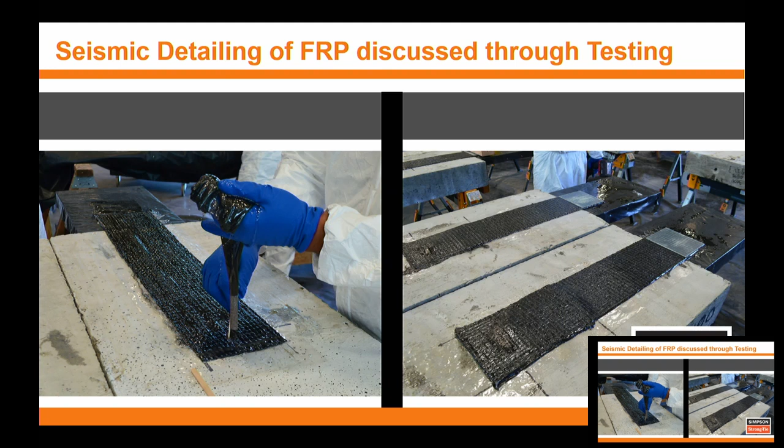And like Enrique mentioned, Garrett was here also for the FIB symposium. So we have Enrique with his research and testing, me from the manufacturer side, and how this information is useful to consulting engineers like yourself. I think we are trying to build a story here today.

So I think we've already gone through this. Both Garrett and myself and Enrique, we are all involved in several ACI committees. Maybe one more thing to add, a lot of other people are involved in this, so this is not an effort by just 3 of us. OSHPD is a governing agency in California, they do a lot of hospital retrofit work, so they were involved. KL Structures, Ravi Kanetkar is here, he was involved, and then there's a few more consulting engineers who are involved in this effort.

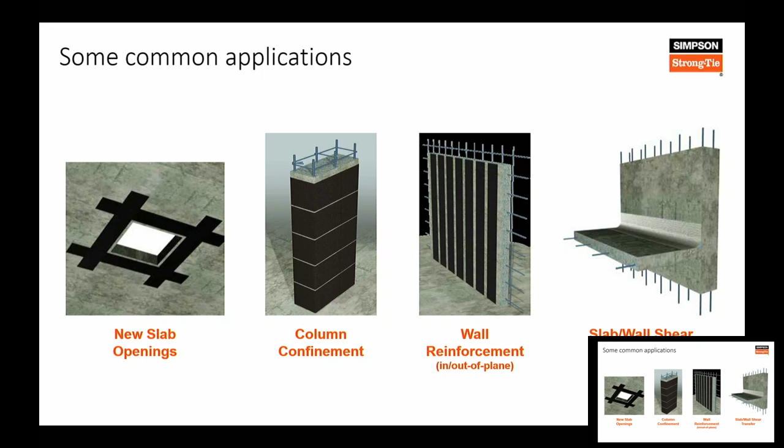Just before we get into the details of testing, we are talking about FRP elements, which is basically carbon or glass fiber reinforcing system. We use a lot of FRP on new slab openings, column confinement, wall strengthening, in-plane shear, out-of-plane mechanisms, and then diaphragms, as well as connections between diaphragms and walls. We'll go into each one of these subsequently in our presentation today. But with that, I'll give it to Garrett. All right.

All right, good to see everyone.

As Aniket and Enrique mentioned already, I'm a consulting engineer in the US, and we do a lot of existing building evaluation and retrofit. My specialty is existing buildings, concrete.

We have a lot of involvement in building code development in the US. The reason I'm here and work a lot with Simpson and others is that there's a big gap in our codes - I think the same in New Zealand - on how you actually apply FRP in design of an existing building retrofit. Simpson has fortunately been doing a lot of testing recently, funding a lot of testing, and Enrique has been contributing to that as well, where we're learning things and hopefully pulling that into our building standards in the US.

Here are a few standards available for FRP. There's an existing building standard, some of you may be aware, that we use in the US called ASCE 41. I believe you have a similar assessment type standard based on a lot of the concepts in there. Then there's ACI 440, which tells you how to strengthen with FRP itself.

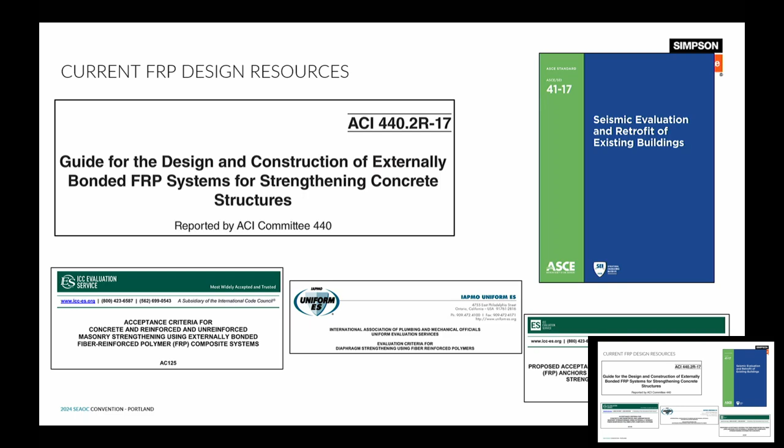The funky thing in the US is that the FRP standard does not talk at all to the existing building evaluation standard. So we have loads and acceptance criteria in ASCE 41, but it doesn't tell you how to use FRP. ACI 440 tells you how to design FRP for strength, but it doesn't tie that to the acceptance criteria in ASCE 41. We do have some other criteria out there, but again, they're inconsistent - they don't talk to each other very well.

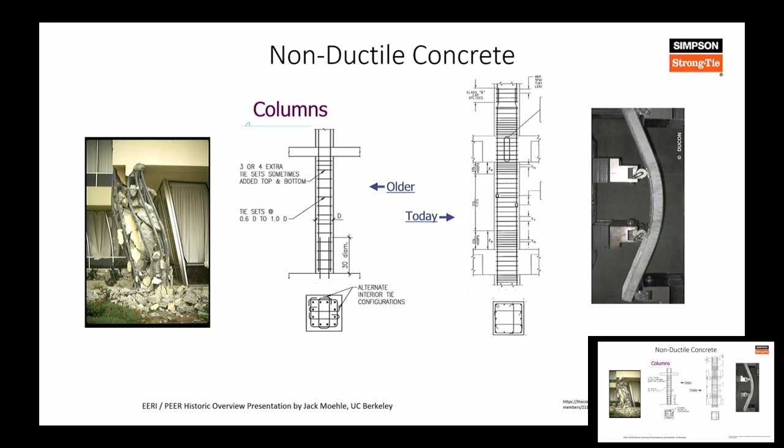In existing buildings in the US, we tend to have a problem with non-ductile concrete buildings. These are usually cast in place, so we're not typically dealing with the precast connections that I know you all have a lot of. But it tends to be light reinforcing and non-ductile behavior in the concrete elements.

The approaches we tend to take for this are either to add strength to the building, which usually means adding stiffness - you're trying to limit the amount of deformation demand on those non-ductile concrete elements. Or we're adding ductility, usually with FRP, by changing the mechanism. So if it's a shear-controlled mechanism in a column, we're making that flexure-controlled instead and hopefully getting more ductility out of it.

I'm sure all of you are aware of the concepts of ductility and brittleness or non-ductile behavior. In ASCE 41, we call something that's ductile as deformation-controlled. It doesn't have to be that ductile to be called deformation-controlled, but it means that we get a ductility factor for that type of behavior.

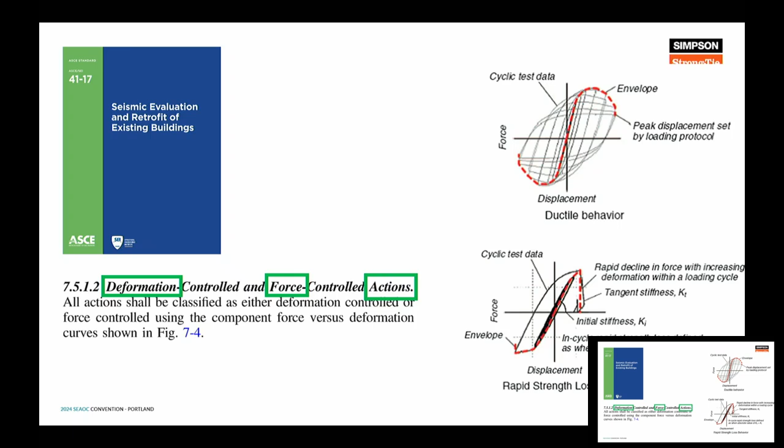Very similar, we call it an M factor in ASCE 41. I think it's very similar to your ductility reduction factors you all have in New Zealand. In ASCE 41, it's an M factor; for us in new design, it's an R factor, but it's a ductility reduction factor nonetheless.

Now, the standard says if you don't have a table that tells you what M factor you get, then you have to treat that action as force controlled. What that means is you get no ductility reduction factor in ASCE 41. At that point, you're designing based on a capacity-based design concept essentially - trying to make sure that's not the governing mechanism in your load path or system.

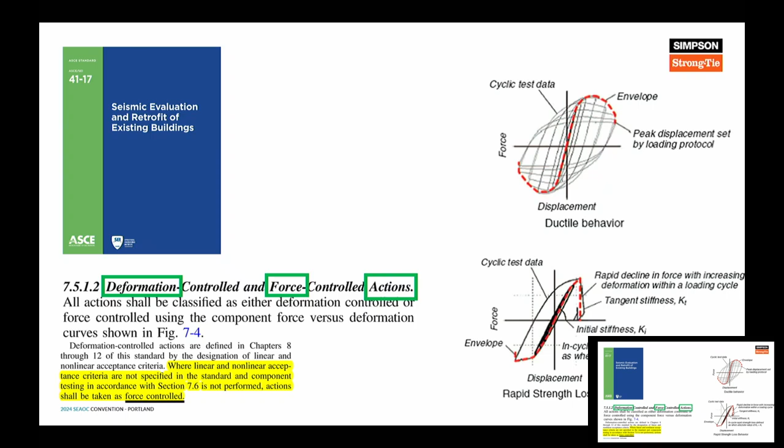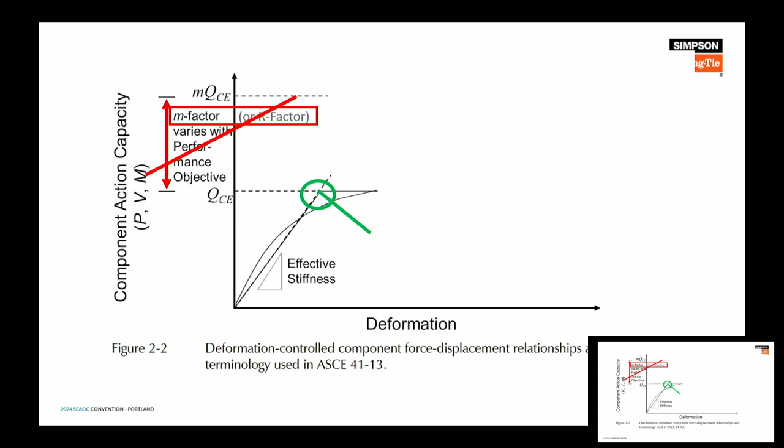That's generally the idea. So FRP we think of as pretty non-ductile. We don't think of delamination or rupture of FRP as a ductile mechanism, and we treat that as force controlled, at least right now. What that means is you don't get a ductility reduction factor - you have to design that mechanism essentially as being elastic in the FRP itself.

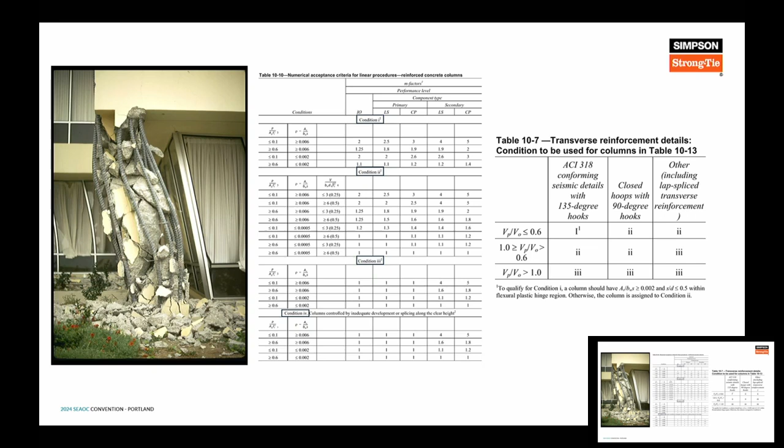Just an example of how we might apply this, and hopefully then we'll show how we're lacking some of this data and how all the other test data that Aniket and Enrique are going to show will benefit us. Right now, typically in an existing building, you might have a concrete column that's shear controlled, right?

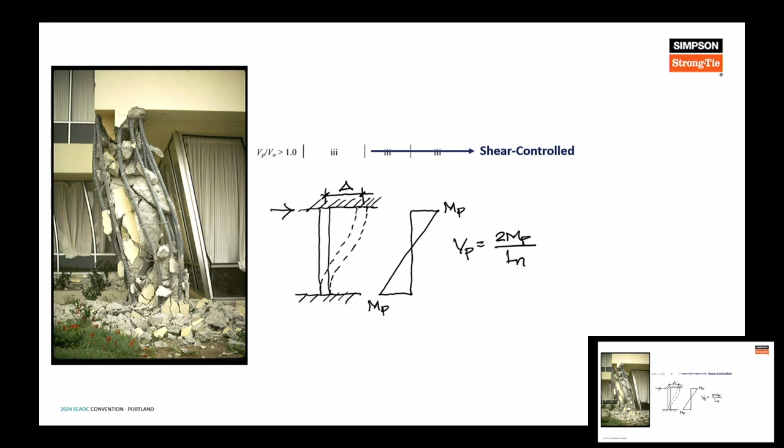So it has light reinforcing up the height of the column, governed by shear. An approach that would be pretty common in the US is to try to make that flexure controlled. So we use 2Mp over L - basically the moment capacity at each end, assuming a hinge - to get the shear demand in the column, and we put enough FRP up the height to change that mechanism.

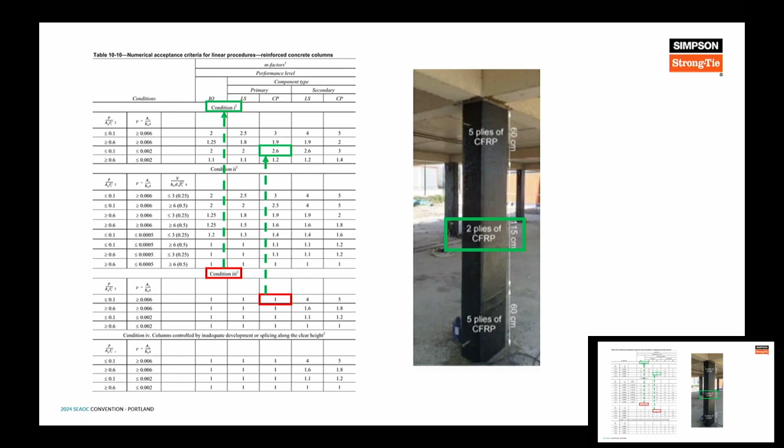So no longer is it shear controlled - that would be condition 3 here, which has an M factor, but it's an M of 1, so you get almost no ductility reduction factor in ASCE 41 anyway. But now it moves up to a 2.6, so you get some ductility reduction factor in your design when you can change that from a shear-controlled mechanism to a flexure-controlled mechanism.

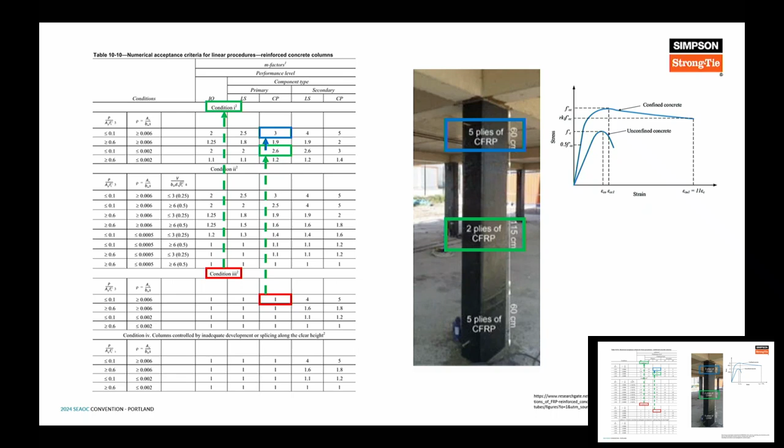And if you want to add even more ductility capacity, you can confine it in those plastic hinge regions. Again, the FRP itself isn't the mechanism, but we're using the FRP to confine the concrete. And then we have a flexure-controlled mechanism that you can use your Mander model or whatever else to design with. But ASCE 41, you can get an M factor for that.

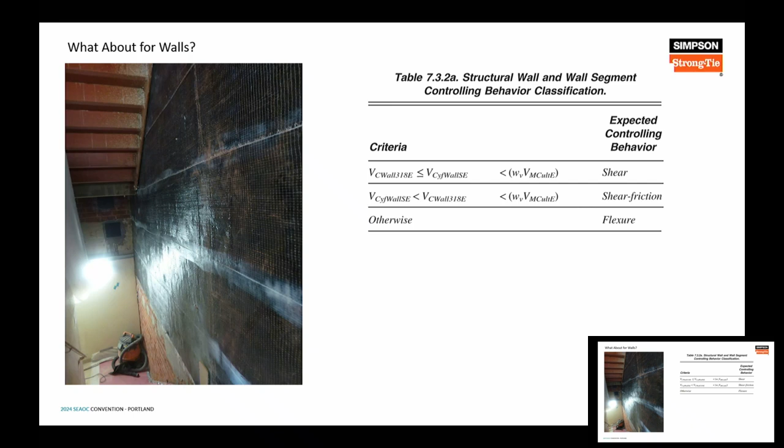The problem comes up when we have things that you can't really easily change the mechanism, right? So in concrete walls, for example, you oftentimes have a very long, squat, shear-controlled wall, and it's not really a reasonable thing to be able to add enough FRP to change it to be flexure-controlled, like with a lot of our columns. So what do you do in that scenario?

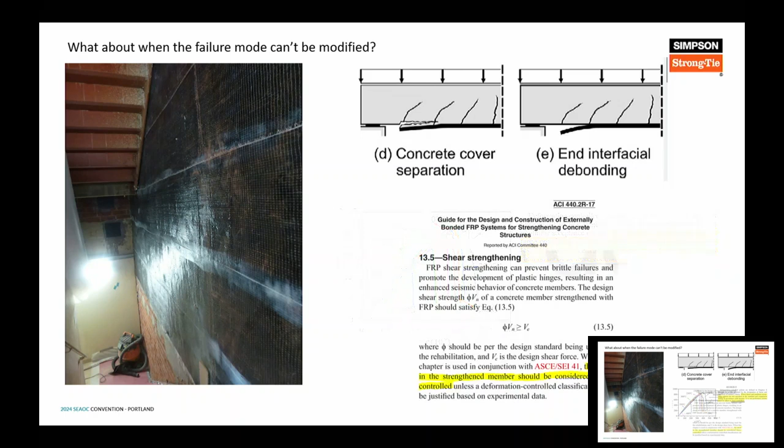If you can get a decent amount of increase in ductility, great, but if you can't, and you have to remain shear-controlled, we have to treat that FRP right now as a force-controlled action, and that becomes pretty infeasible, I would say, for a lot of buildings. At some point, you can't add so much FRP that you make the building elastic. The building's going to drift how it's going to drift, and you can only add so much FRP to decrease the drift demands. This is the statement in ACI 440 that talks about force-controlled behavior.

So I'll just talk briefly about the testing going on for walls, and I think there are a lot of tests. Aniket, I think, has more slides on this. But this is a program that Simpson put together at their lab in Stockton, California.

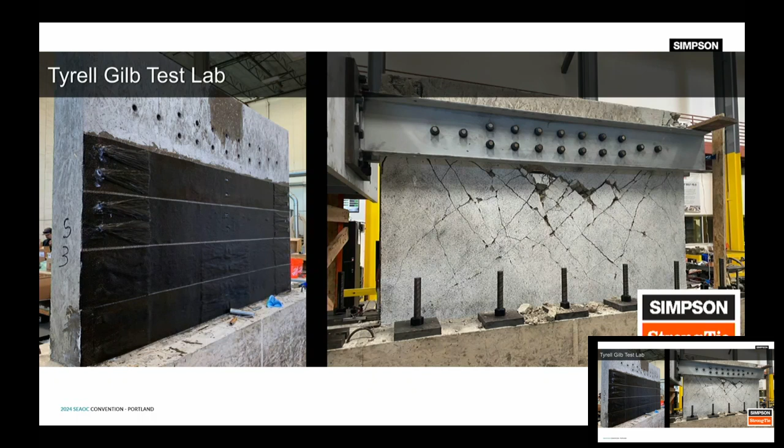And these are, you can see, a very squat wall, so it's very intentionally shear controlled. And it's meant to be so shear controlled that even after adding FRP, it remains shear controlled, because we want to see how much ductility it has in that scenario.

And that's a really key thing. That basically comes from that detailing that Aniket was referring to, anchoring well enough to where you're holding that concrete together. So you're ultimately getting sort of a crushing mechanism in the concrete, but you're able to get some of that ductility out of the vertical bars yielding along with the horizontal bars, and you're holding everything together as opposed to having the FRP rip off and delaminate and having your strength degrade right away.

So we're actually developing criteria now for this. Say, okay, if you have a shear controlled wall and it has these conditions, and you anchor it sufficiently well - and that's a key point, because we had a specimen where the anchors were not deep enough, and the anchors did basically nothing for the behavior. The FRP did very little for the behavior.

If you anchor deep enough, and you anchor to the capacity of the FRP and you hold everything together, you can get a deformation-controlled response, is what we're finding.

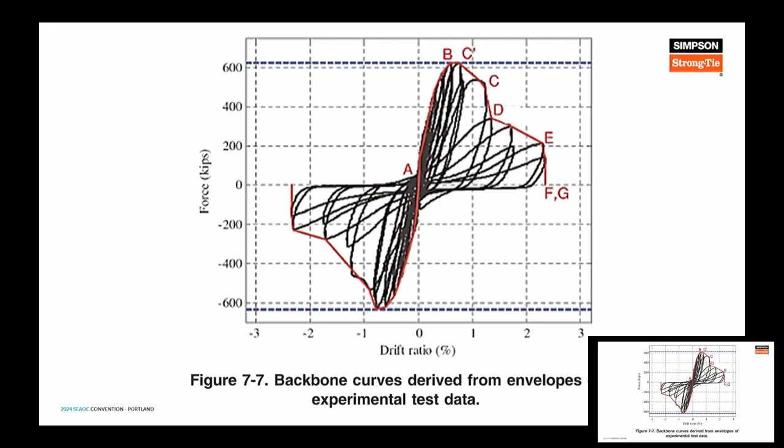So in ASCE 41, the way we would utilize that information is you have a backbone from your hysteretic curve, your load deformation envelope, and then we're going to pick some key points from that curve to basically get our acceptance criteria. The most important one being collapse prevention, because pretty much everything is governed by collapse prevention for us. That's kind of our biggest hazard check.

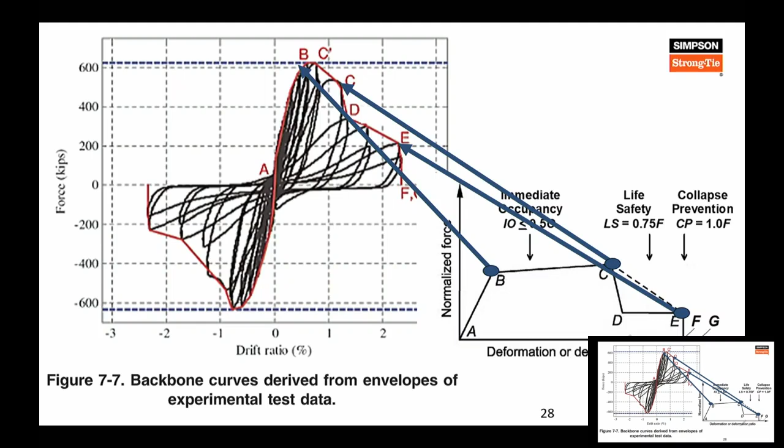I think here you have like one design level earthquake you check, right? We would have a design level earthquake in existing buildings and kind of a maximum considered type event that we're checking for collapse prevention explicitly. So that tends to govern at least a lot of our designs in California.

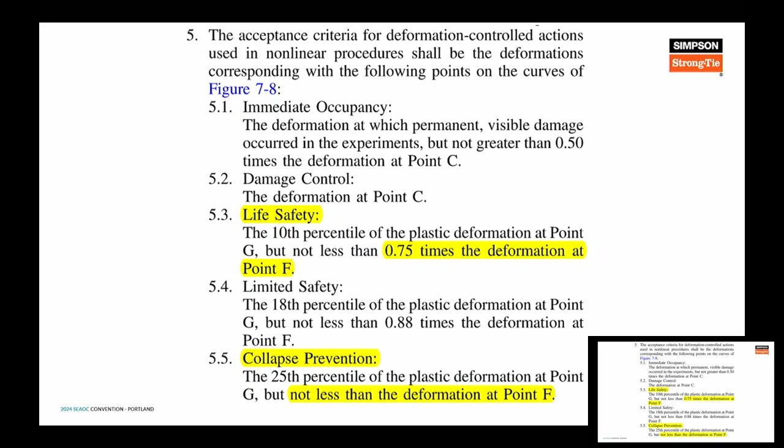So just pointing out, I'll wrap up here, but those are key points that you could draw from this actual shear controlled wall test. And that point again at the end is going to determine usually the collapse prevention limit. And you see a lot of the other points actually come off of that. So even our life safety limit, which you might use for a design level event, is backing off of that collapse type deformation. So just some points about things that are being developed. I don't want to take too much time here, but we're putting together these criteria.

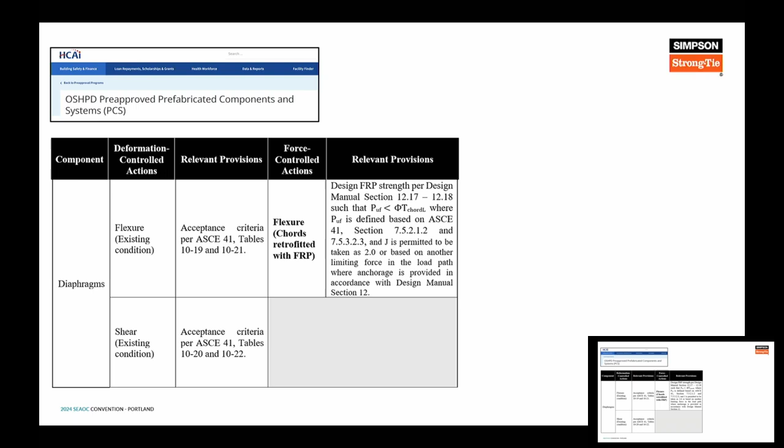This is from a pre-approval that we've been working on with Simpson on hospital review agency. We're hoping to clarify a lot of those actions and how you treat it as deformation controlled or force controlled. So, to be continued. Aniket, I'll transfer over to you.

Thanks, Garrett. So the next part, we are going to jump a little bit into diaphragms and shear transfer between diaphragms and walls in our next segment.

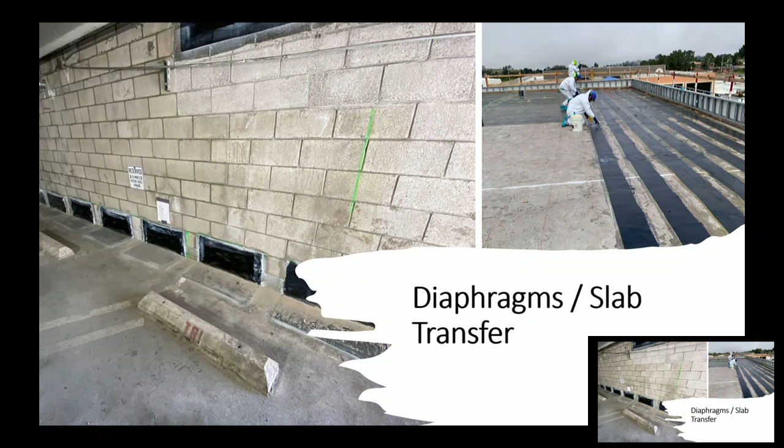So just to give an update, there are three big diaphragm test programs. About two to three years ago, there was not much research in strengthening diaphragms with FRP. A couple of years ago, Virginia Tech, a university on the East Coast in the US, got a grant from ACI 440 or ACI Foundation to study the behavior of FRP reinforced concrete diaphragms. Since then, they have done about 12 specimens so far, and I'll go a little bit into that.

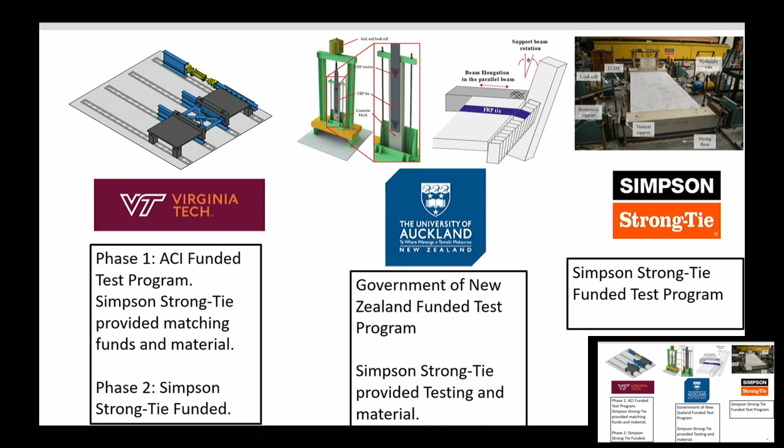Then Enrique and his team at University of Auckland got a big grant with the ministry here, specifically looking at precast diaphragms, which is very common here, but now they are expanding into collectors and shear transfer and some of the other elements, and he'll go through it. And then we were working on some diaphragm strengthening as well in the US. So all of this research is now coming together to a point where we have some decent understanding of how we can strengthen diaphragms with FRP at this point.

So going back to where we are, ACI 440.2R, which is what we currently use for design, FRP design, doesn't talk much on diaphragms. There is a task group, and all of us here are part of that task group. There's a building code, 440.13, so this is not a guide but a code that just got released a few weeks ago. It is only limited to gravity applications, not seismic. The next edition of this will have seismic.

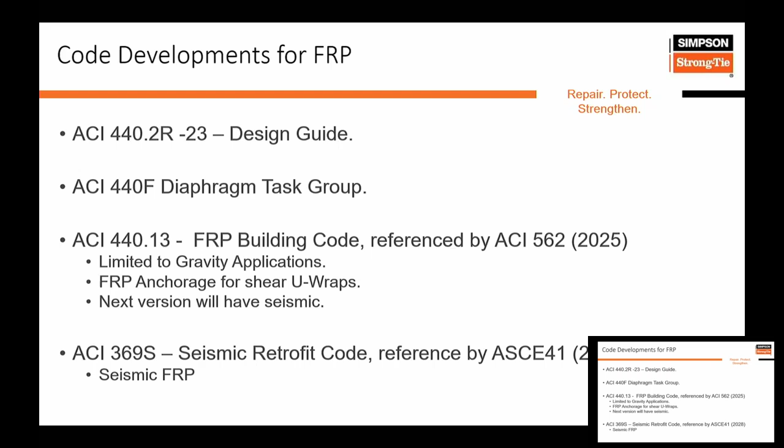And again, 369S is the seismic code, which will now talk about FRP strengthened elements as well. The first edition of that will be 2028. So all what we are talking today is part of all these documents.

So when we started doing this research, we started with a very simple test. And the question that we had was, how does multi-layer FRP ties behave on a diaphragm? We normally use 2, 3, 4, 5 layers of FRP. Most of the research that was there was done on a single layer FRP application with very thin ties.

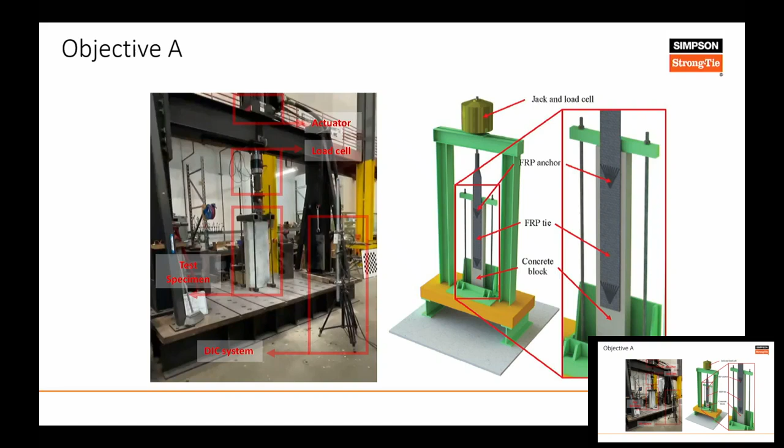So the simple test setup that we started was, we had a block of concrete. We have a block of concrete that you see in the middle there, test specimen. There is FRP right in the middle, as you'll see in the picture on the right, and you're pulling that FRP straight up. So this is a monotonic load test where the FRP goes in pure lap shear, and you're looking at the debonding mechanism of FRP, and then we did some more with anchors, and I'll go over that later.

The behavior on this specimen - again, the specimen is in the middle, there's a strip of FRP in the center. The concrete is painted white with black speckled dots. That's because of the DIC camera that's taking images, and it's tracking each of those black dots to give you a strain profile on FRP that's bonded to the concrete.

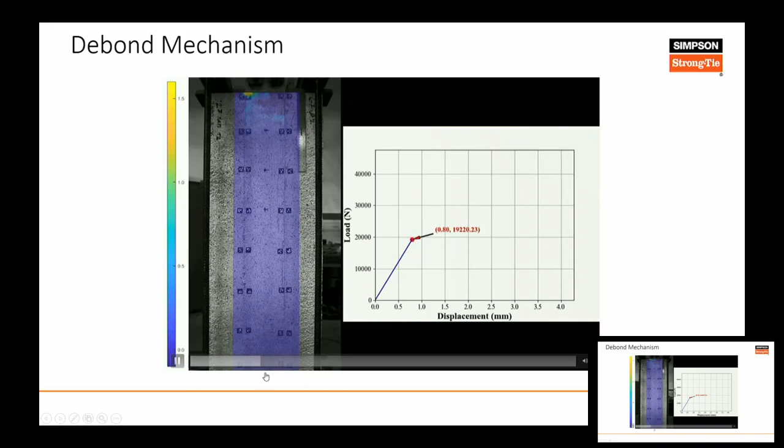So as this picks up, you pull the FRP, at some point your FRP delaminates, and once it delaminates, it continues to delaminate, and then...

Can you guys hear me? Yes, okay. Didn't like the video, I guess. I think maybe you did. I was trying to figure out if I was moving or something.

So once at a certain debonding load, the FRP delaminates, and then it just continues to delaminate. So if you think of a long FRP strip on a diaphragm, at any point where the force goes high and the FRP delaminates, you're just going to continue to delaminate your FRP right there. So why is this important? Most of the times for seismic demands, we are almost guessing, right? We don't know what exactly our seismic demand is. If your seismic demand exceeds what you're designing for, you're just going to instantaneously lose your FRP.

So this is not something that we want for seismic loads. So the next part that we thought about - and we did several hundred of these tests with multiple layers of FRP - we found that bond is unreliable. And why do we say that?

Most of the testing that we do here is on new concrete, because all of us pour new concrete in our lab, we put FRP, we test it. But the same when we are putting FRP on actual projects, these are 20, 30, 40, 50, at times 100-year-old concrete buildings. So there's imperfections in the concrete.

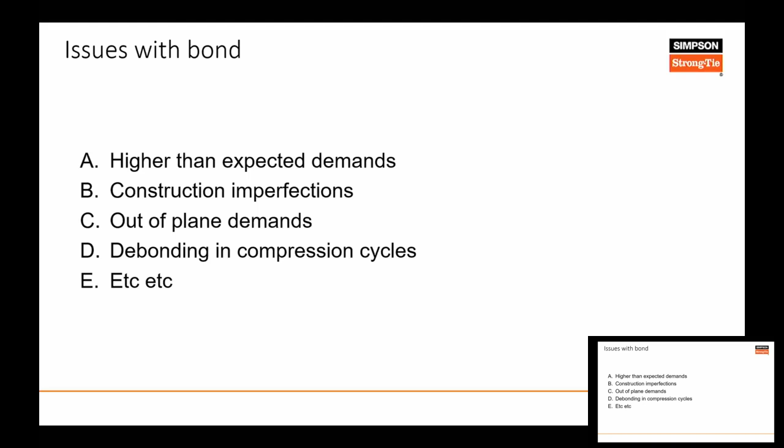So we didn't want to rely on bond to be our sole mechanism to transfer the forces between concrete and FRP. So the next thing to do was come back and put an FRP anchor.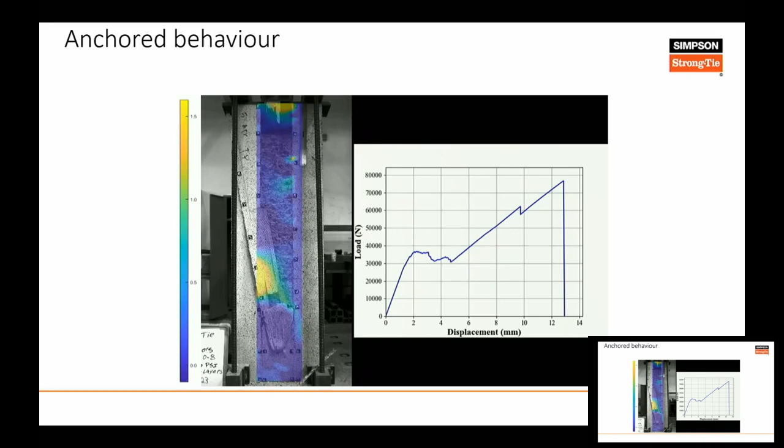So now with the same test, with the same FRP, at the same point it delaminates, which you see the change of color, but as soon as it hits the anchor, it just continues to pick up that force, until a point where either your anchor ruptures or your FRP strip ruptures. So at this point, and this is quite repeatable, you do test after test after test, it almost delaminates at the same spot or same location, then it continues to delaminate until it hits an anchor, and then it continues to pick up.

I don't know what is happening. Okay, so I'm on the phone. Let's try now. Maybe. Okay, so I'm just going to yell. I think I'm good at yelling.

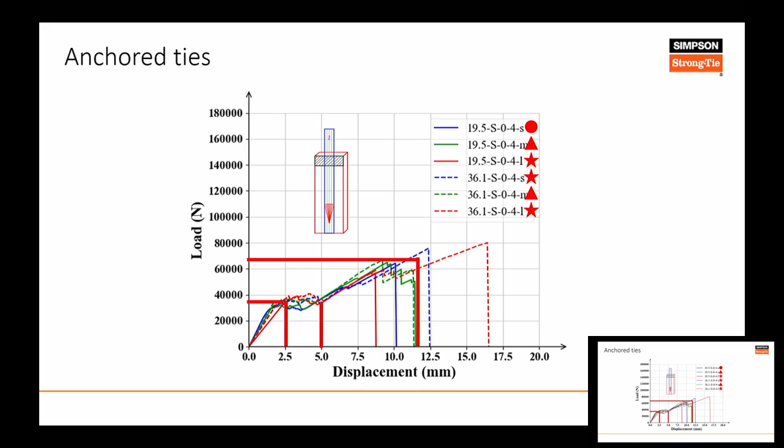So when we do that, now it's kind of repeatable, we know the behavior. So at this point, it's not purely brittle response that you would expect if you would just rely on the bond. It's going to debond, it's going to continue debonding where you get that flat line, and at the anchor it's going to pick up that force. So this is something that we can live with, and we can kind of get those points where it debonds and where the anchor or the ties rupture.

The next thing that we think about: if you just put one anchor at the end, most of the time transferring all that force into one single location, you can now start breaking the concrete beam, and Enrique will kind of talk about that. Plus, if your loads are too high, you are now going to concentrate all that load in a very specific area, and you may get different failure modes at that location. So at times you would need multiple rows of anchors, especially if your forces are high. You may need multiple anchors to share the force between the two anchors.

So again, this is good behavior. We know that anchors help. If you put anchors together and if they're designed well, they work and they share load between the two anchors.

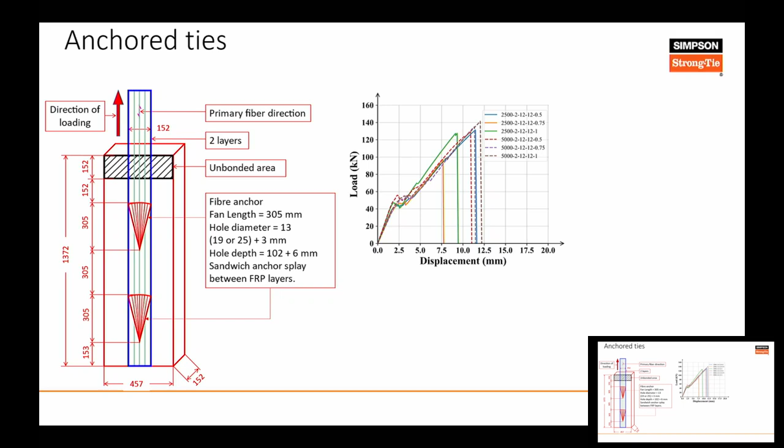We're looking at how far these anchors really need to be, because at some point the behavior changes. Once your FRP debonds, the first anchor picks up the force, but because the space between the two anchors is large, you get a flat line in between, and then your second anchor is engaged after that. So the two anchors are no longer working together - one anchor works first, the force goes down as it debonds, and then the second anchor picks up from that point.

So you can place these anchors. They need to be close enough so that you can share the force. They shouldn't be too far apart, or you won't get that load sharing between the two anchors.

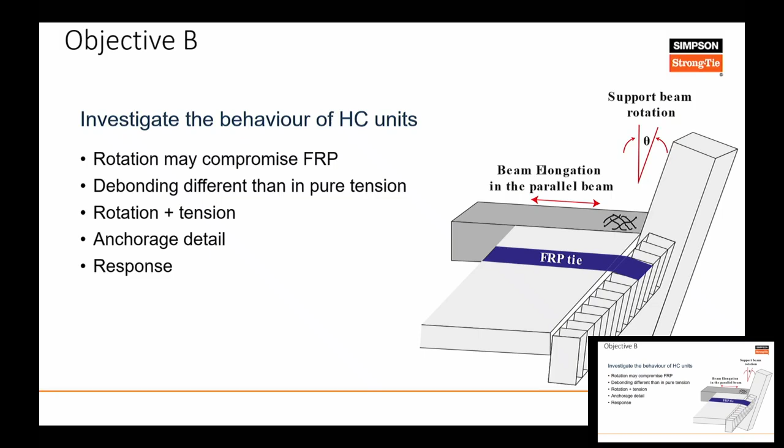So the question from industry when we started this project was, how do you know the FRP is going to survive those deformations? Is it going to pinch the FRP in compression and buckle and break it? How are you going to detail when your beam is like 300 millimeters wide? A lot of very valid questions, but to be fair, this is overblown in terms of scale. You can see the column is halfway there, but in reality that angle is like 1 or 2 degrees.

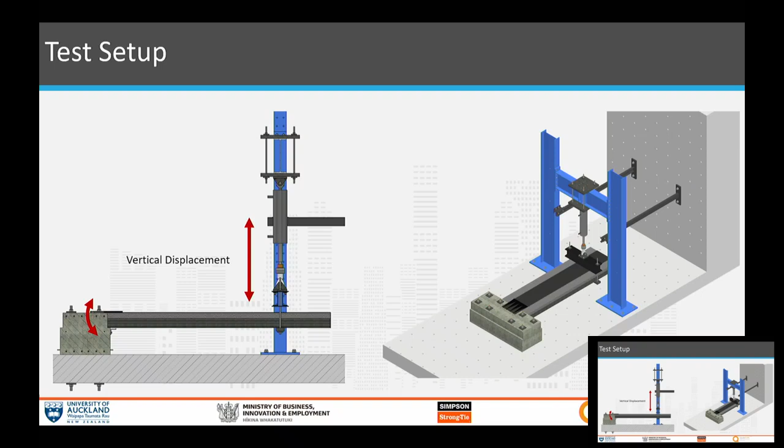The deformations are minimal. But basically what we did is copy this testing setup that maybe you've seen from previous work on precast without FRP, where we have the beam clamped down to the strong floor, and then the precast floor with the topping on top, and we move up and down, creating a negative and positive moment at the connection. Then we have the FRP on top with different anchoring details to take that tension force.

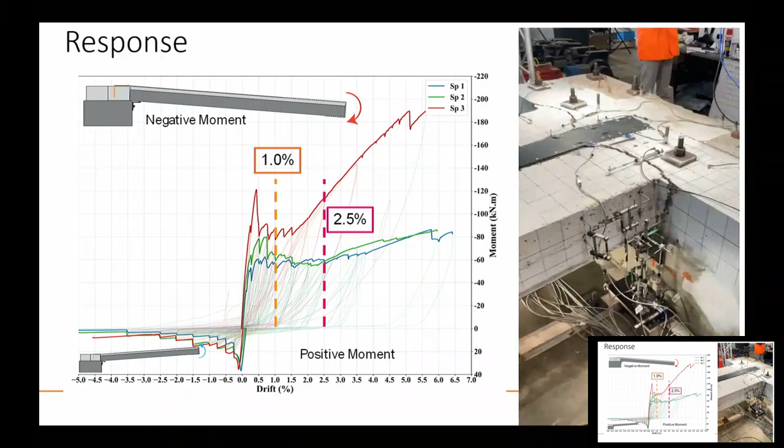That means 6.4% drift - that's the floor all the way down at 6.4% lateral drift. The FRP is still holding. Anchors are holding.

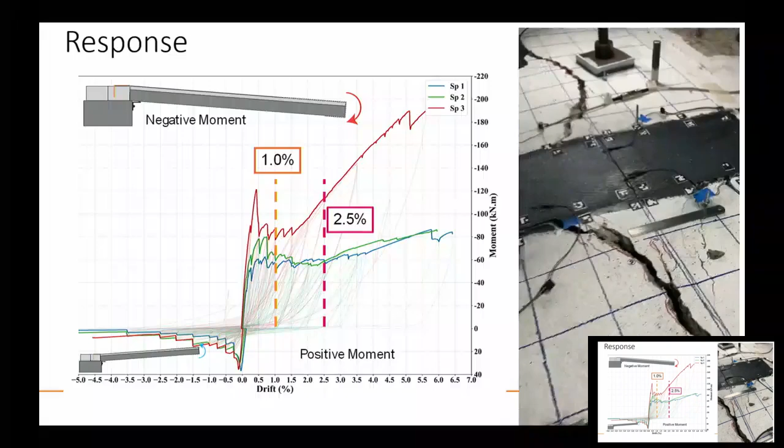6.4% drift and 0.7% strain - this is at the end of the test. This is tests 1, 2, and 3. Basically this is showing the exact same response we saw in the ties: a very elastic, stiff initial response, then the FRP debonds. Depending on the stiffness and whatnot, we have longer or shorter plateaus.

And then at some point, the anchors pick up that load, and it becomes a cable - basically an elastic spring between the anchor point on the beam and, in the test case, the anchoring point at the loading end. If this were a real building, we'd have one anchor there and one anchor in the next beam, becoming a cable between the two beams.

Now, to bring a little context on the real design - Mohammed put here a 1% line, which is a common drift level in these strengthened buildings, and 2.5%. At 2.5% lateral drift, something else has broken for sure - the building isn't going to be usable if we reach that level. But we still have so much to go. Even at 6.5% drift, the strain is only 0.7%, about half the rupture strain of the FRP.

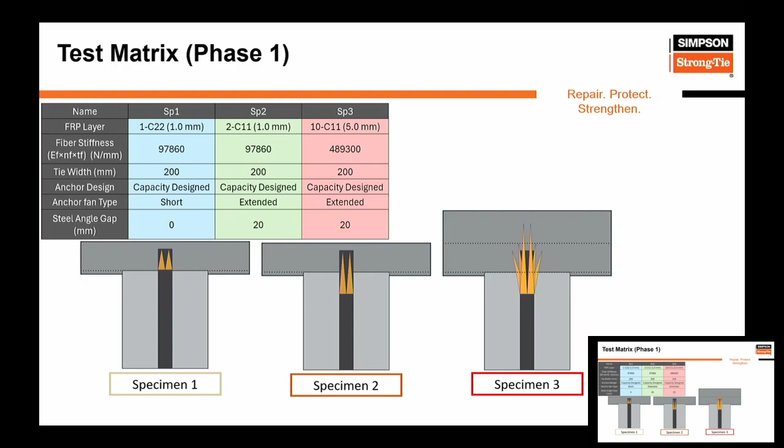That's why the response was so steep. We tested different anchoring details, and we also tested the gap of the steel angle at the bottom, whether it's right up against the floor or we have a little gap, and it doesn't make any difference at all. So we were very happy. We thought, okay, this is great, we can go home, we nailed it.

Until we went to test number 4, where we made it full width of the FRP, which is what we use in real life. And what happened? We broke the beam. We destroyed the beam completely. Why? Because we introduced a shear failure plane there, and we broke out the beam - a breakout failure.

In hindsight, it's obvious, right? Hindsight is a beautiful thing. On the day, we're panicking, losing our hair, thinking what is going on here.

So we thought, okay, let's extend the anchors, try to move the failure away from the plane, from the interface, back into the unit, so the FRP bonds here, as we saw in tests 1, 2, 3.

That was much better, but still we broke the beam - the stirrups held it together, but we still broke the beam. I have to say, even though we broke the beam, that happened at 2% drift, I think, right? Or 3%? 3.5% lateral drift. So this is way beyond design criteria. Something else has collapsed for sure. Still, I don't feel comfortable designing that.

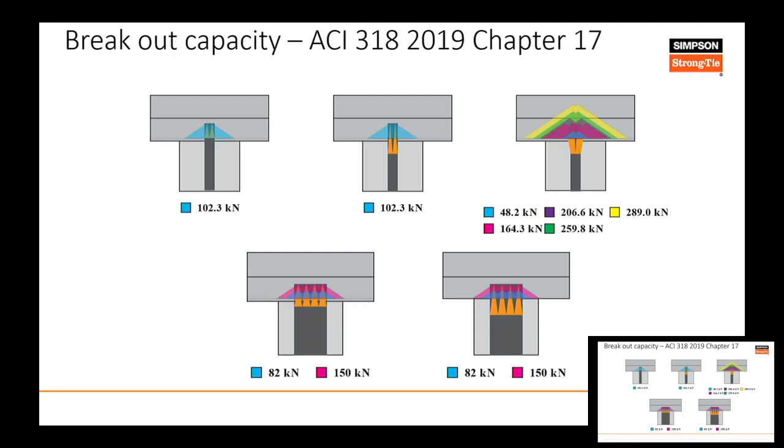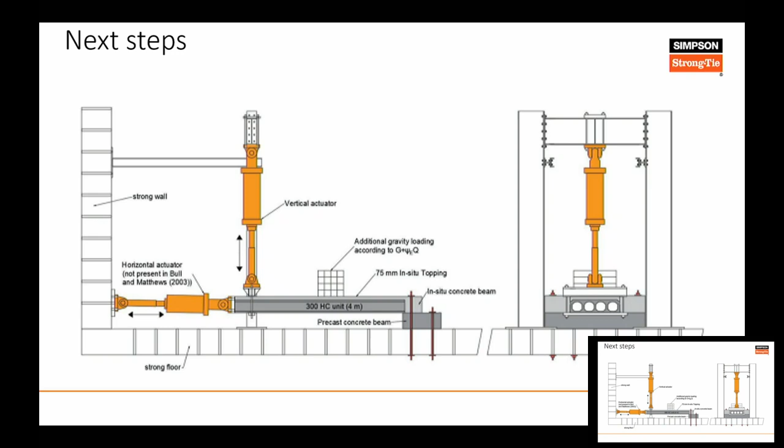What we are going to do next, Mohammed is going to do one more test tomorrow, but after that we are going to include tension and rotation. Of course this is going to make it worse. The question is how much worse. That will happen next year. And with this, I will leave it to Aniket again.

Thank you. Thank you, Enrique.

So the next segment, going from these tests to now a full diaphragm test. This is work done at Virginia Tech University with respect to diaphragms. This again goes back to how we look at diaphragms in the US, looking at it as a deep beam instead of a strut and tie model. But some of it is relevant here.

We wanted to see what the debonding strains were, what is the ductility, what happens when you don't detail FRP that well, and what happens when you detail FRP well enough.

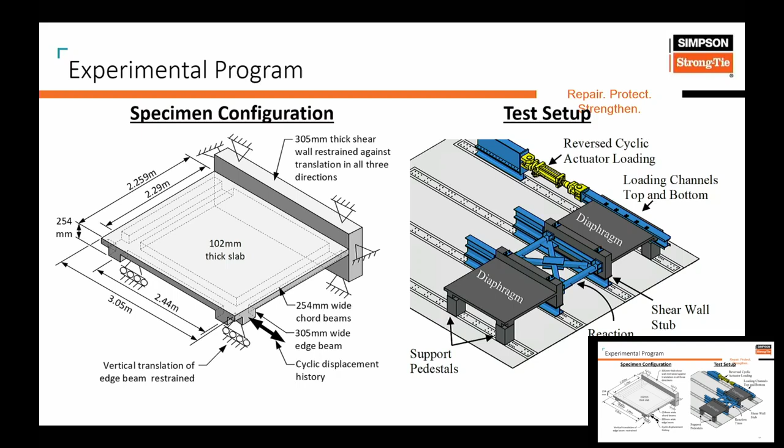So their test setup was a little bit different. They kind of put two specimens at the same time. Looking at the picture on the right, it's about a 3 meter by 3 meter diaphragm with a shear wall on one side. There are two separate specimens, and an actuator pushing and pulling that diaphragm specimen. Once they test one specimen, they get the actuator and test the other specimen at the other end. So the tests are 7, 8, 9, 10, 11, 12.

The first 6 were not super relevant - there was still one layer of FRP with a lot of steel. These are all concrete specimens, low strength concrete, about 20, 22 MPa, with more FRP.

So we have 2 layers of medium thickness FRP in one direction with anchors. Going back to my previous discussion, because the forces are so high, we cannot put one row of anchors - you're going to easily pull out those anchors at that location. So we have 2 rows of anchors sharing the force.

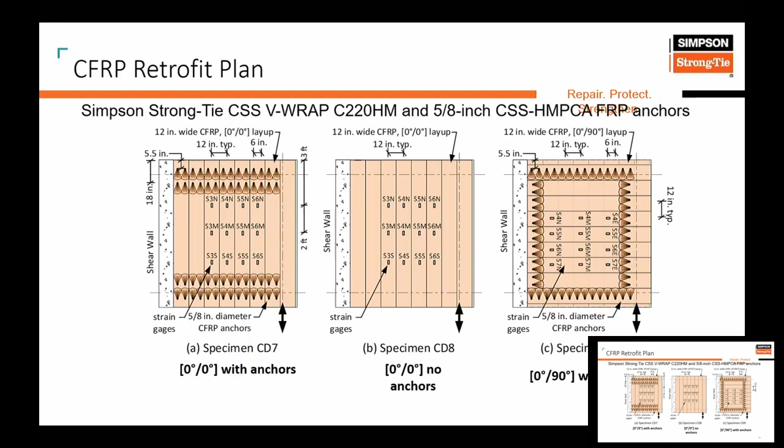For CD8, we put the exact same FRP as CD7, but removed the anchors, and wanted to see the behavior of that specimen. For CD9, we took the FRP, divided it into half, put it in each direction, a little bit like how you guys do it with strut and tie here, and then anchored all the perimeter of the diaphragm. In the interest of time, I won't show all the videos.

This was the video of the specimen with no anchors. And as I play the time-lapse video, this right here is your wall.

This right here is you're moving the beam back and forth. This is just the top view, and this is kind of the isometric view of the specimen. As this starts to move more and more, maybe focus on the picture on the left-hand side. That will give you a little bit better idea.

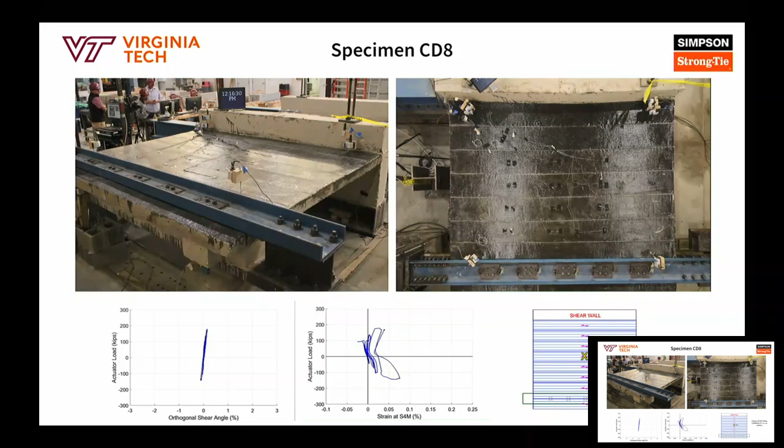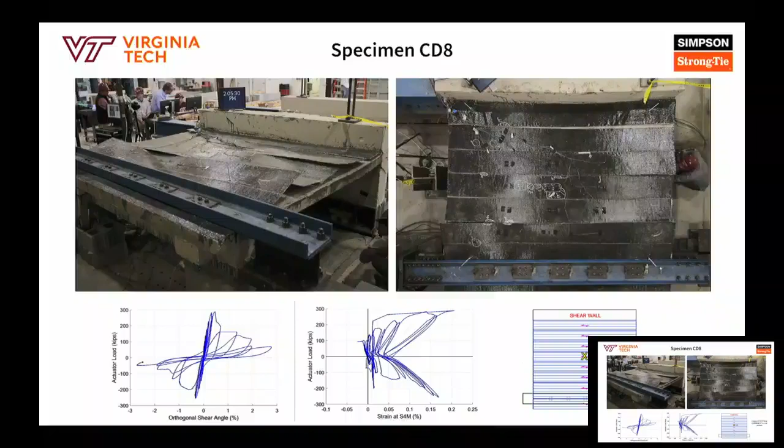At this point, FRP bond is enough, it's kind of picking up all the force. But when it debonds, you can see how the debonding mechanism goes. So this is again FRP with no anchors. FRP has started to debond with those chalk marks, but once it debonds, your entire FRP is just lost. In an instant, you basically lose your FRP, and then you just have sheets of FRP floating on your concrete substrate.

Now looking at the other ones, in the interest of time I didn't have the other videos, but CD7 was the one with anchors. You still got your shear crack. When you go underneath the specimen, you had cracks, but the failure plane was more shear friction at the end, the connection between your diaphragm to the wall.

The CD8, which doesn't have anchors, you just saw that you lost your entire specimen. Once you lost your FRP, your concrete just got crushed, all the concrete fell down. That's definitely what you don't want in your building. If your forces exceed your FRP debonds, you don't want any collapse of your building or slabs, potentially injuring people. And then the other one on the right there is anchors on all sides.

Again, the specimen is in much better shape, but it failed in shear friction. At about very high loads, the connection between the concrete specimen and the wall broke, and then the specimen just started sliding. Again, something that we can control - we can reinforce that connection, but based on this, just the importance of detailing FRP with FRP anchors is crucial.

So now that we did that, now there's different ways we strengthened our diaphragm, we added all that stiffness or the FRP on our diaphragm. How do you get that force back into your lateral system? These were tests done at NCSU, North Carolina State University. You have a wall there, you have a slab, and there is nothing connecting the wall to the slab. The only thing connecting the two is layers of bidirectional FRP with FRP anchors. You hold the slab steady, and you can see the jack that's pushing and pulling the wall. This is transferring your shear across the joint between your diaphragm and the wall.

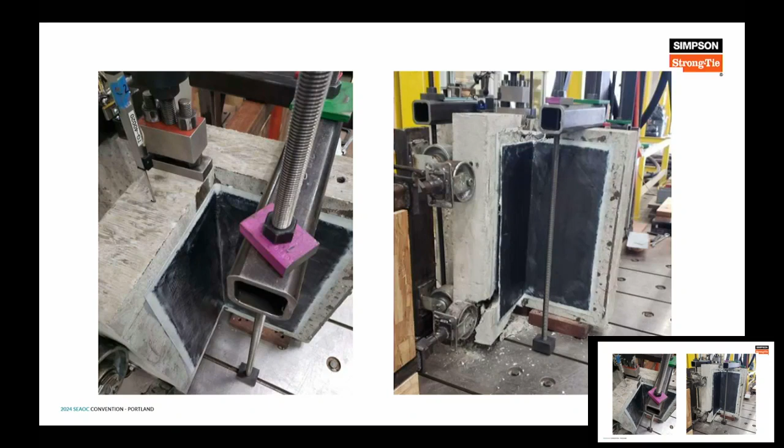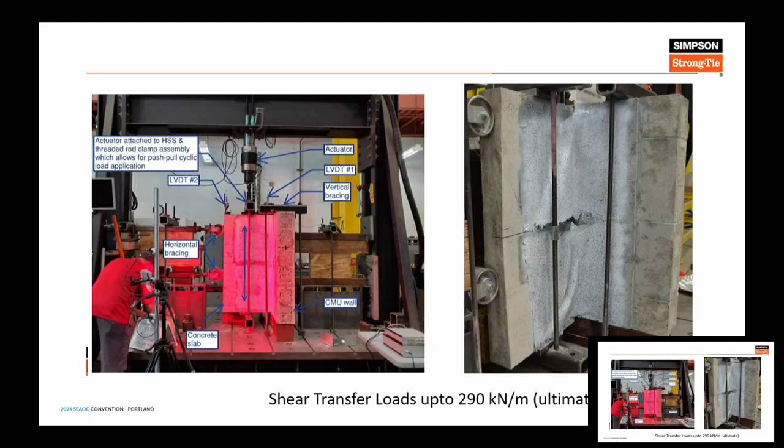The same thing - this was another test we did for certain projects where we had higher force requirements. Again, the same concept: you have the wall and the slab with FRP across the joint. This was actually a precast member with FRP, and this was just one layer of FRP connecting the precast diaphragm to a masonry or concrete block wall at that location. Between all the tests we did, the highest connection we had was about 290 kilonewton per meter, and these are ultimate forces. Some of the one layer connections obviously had less, but we could strengthen these up to 290 kilonewtons per meter. So you can get pretty high forces into your joint if you detail it correctly.

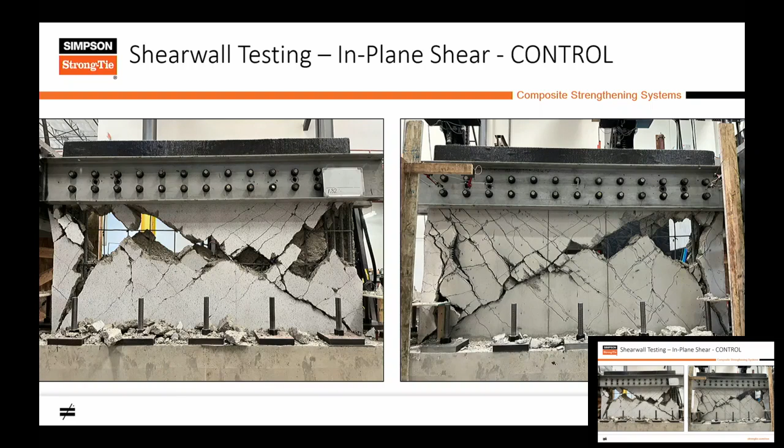So with this now, from your diaphragm you've brought the loads to the joint, to the wall. You can also potentially look at strengthening concrete walls with FRP. Garrett showed a little bit of this, so I'm just going to give a high-level picture of what we are trying to do here. We tested 150 millimeter and 300 millimeter thick concrete walls with FRP, and this is a control wall. All these walls were shear deficient walls, so you had very little shear steel. They were designed to fail in shear, and that's exactly what happened. This is the front side of the wall for the DIC camera, that's the back side. You got a nice shear failure in your concrete wall.

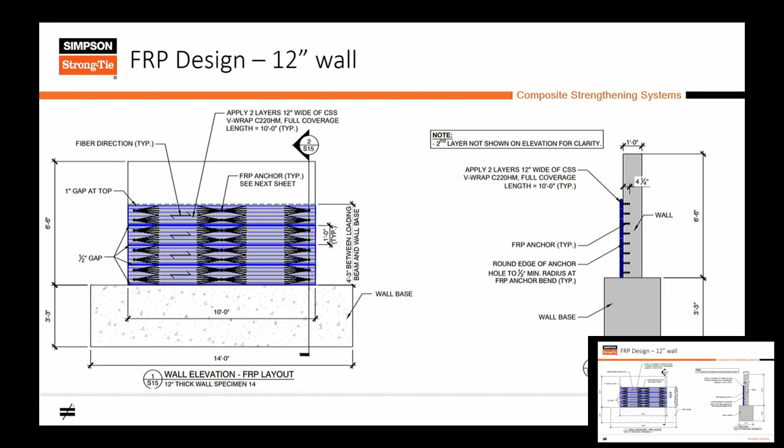We tried different strengthening schemes. By this time we knew we had to anchor the wall, so we added FRP anchors. This was a 12-inch or 300 millimeter thick wall, and we put FRP anchors with only 100 millimeter embedment depth, which is very shallow for the wall. What happened is, in the control wall, you lost your concrete cover and the wall failed.

The same thing happened in the FRP strengthened wall. Because the embedment depth of the anchors was only 100 millimeter in a 300 millimeter wall, the anchors just pulled off and you lost your FRP entirely. This didn't give much strength increase over the control wall. The lesson learned here was you need to go deeper and embed your anchors so you can hold the FRP, confine the concrete, and hold the FRP when it gets loaded.

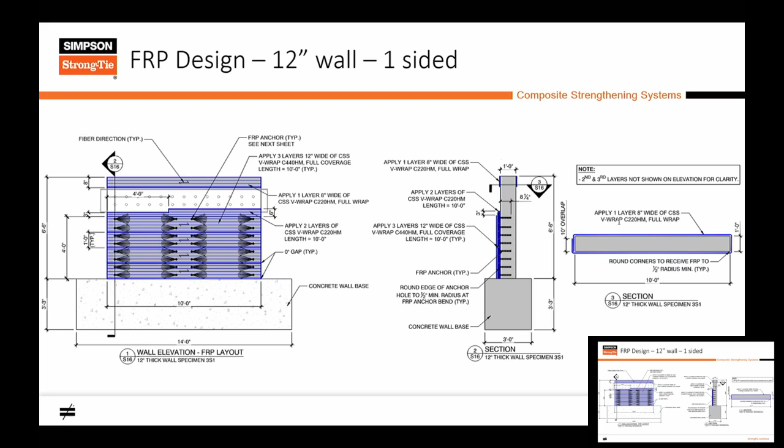So the next one we did was use 200 millimeter deep anchors for a 300 millimeter wall. The response was much better. We again got good capacity increase, good ductility as Garrett showed, and it was not a force controlled response. This was the specimen with FRP now.

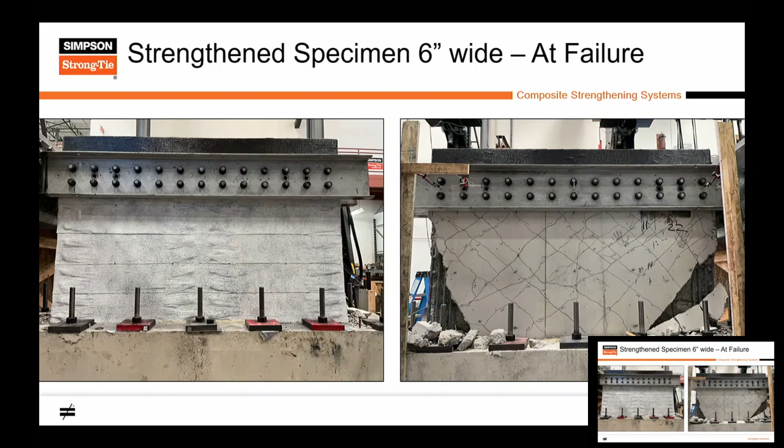Whereas the control wall just failed in shear — this was the control wall with no FRP, failed in shear. You changed the failure mechanism from a shear failure to a sliding shear failure, which has a bit more deformation response than a pure force control response.

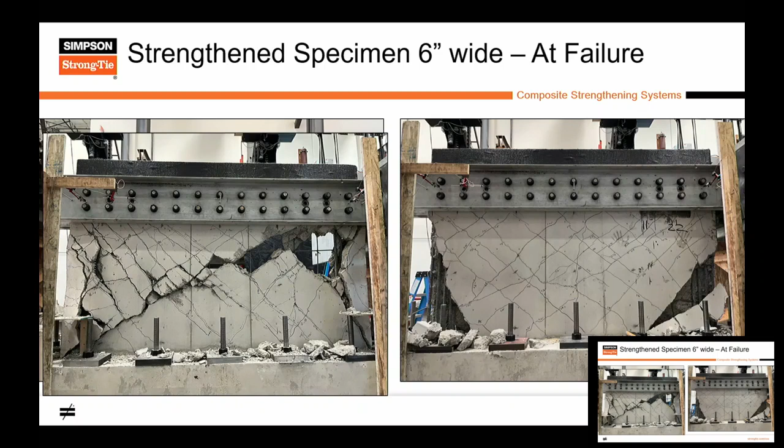So the summary here is: if you detail FRP well, it does pretty good, and you're able to get a good response from FRP. Going back to some of the graphs Garrett showed, up to a certain point your bond does pretty well. After that, you lose your bond, and then your anchors take over until the failure point, which is either your FRP anchors fail, your concrete fails, or your FRP strip fails.

So the summary of the walls is: you can strengthen walls with FRP, but you have to anchor the FRP into the walls to get the response you want. Strengthening both sides is preferred if you can put FRP on both faces, but if you cannot, you can do it on one side and detail the FRP on the walls.

So the last part of my presentation talks about FRP anchors, and this is very important. I think by now all of us have spoken about how FRP anchors are important to get the ductility, the response, and the strength that you want. But how do you test these FRP anchors? How do you go and get values for these FRP anchors that you can start using for design?

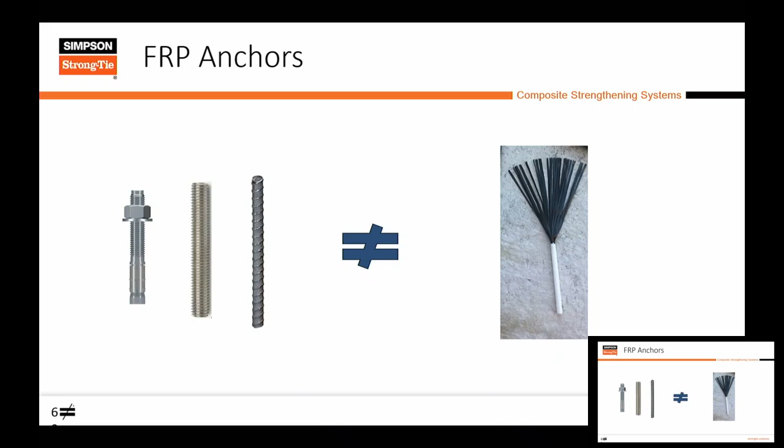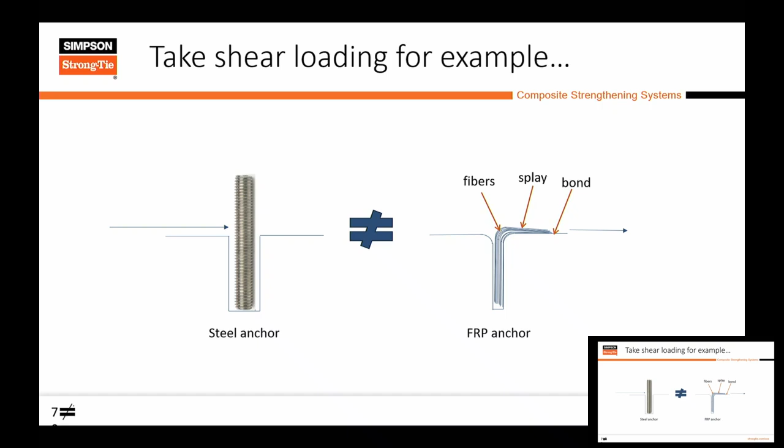To start with, FRP anchors are different from adhesive anchors. Adhesive anchors are steel rods embedded in epoxy. The response of an FRP anchor is not necessarily the response of an adhesive anchor. The big difference is in the load path: your force goes from the FRP strip into the anchor fan, into the bend, into the dowel. So there are three failure paths — the bond to the FRP strip connection can fail, the joint connection can fail, and the dowel can either pull out or rupture. Whereas in a steel anchor, you don't have that failure mode. So this is the key difference between an FRP anchor and a steel adhesive anchor.

And you do that for anchors over anchors at different embedment depths, at different diameters, and you get the value of each anchor in shear. Now we can use that for design.

Just like other anchors, there are other failure modes that you need to look at. So FRP anchor design is not simple where you just look at one failure mode. You can get a straight anchor pull out. So for that, we need to test and see what the bond stress value is for an FRP anchor in concrete, especially if the anchor is straight.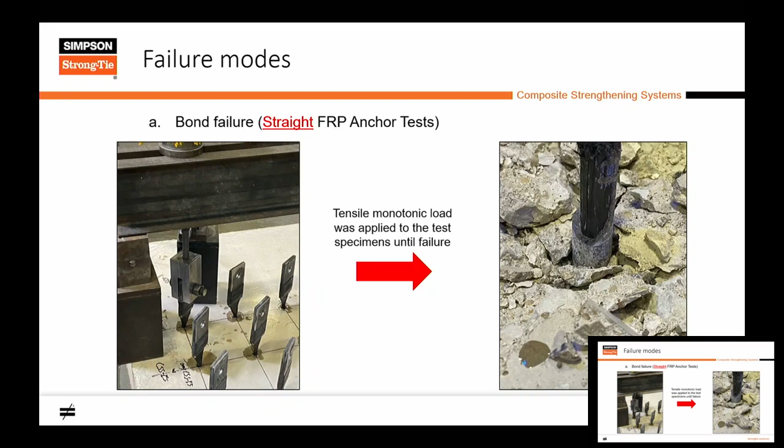And you again do that in cracked concrete as well as uncracked concrete, because somebody just before this presentation asked a question, what happens if the concrete cracks? And we do that in adhesive anchors - something similar, we can also do it with FRP anchors.

Now, in a bent anchor configuration, the same failure mode can happen where your FRP anchor can pull out, especially with shallow embedment anchors, which we have a lot in New Zealand, right? Your FRP anchor can pull off. So you need to publish those values for what your anchors are.

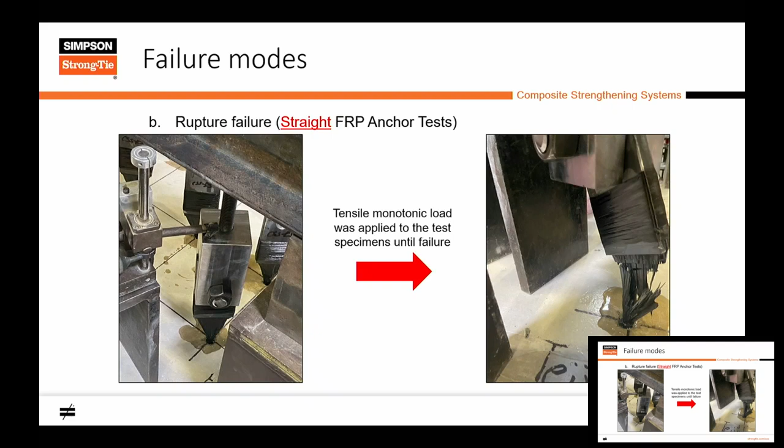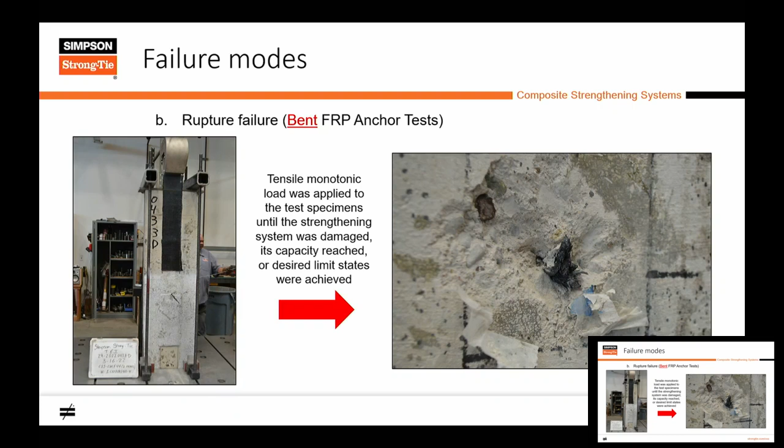Then the next anchor failure is rupture. So if your embedment depth is enough and you're not pulling off the anchor, you're going to rupture the anchor. So again, what are the rupture values for your anchors? The same thing happens in a bent anchor configuration at 90 degree bend, where if you're pulling this anchor, your anchor can rupture right at this joint. So what is the rupture capacity of this anchor at the bend?

And then the last part is the fan, where your fan is on the FRP strip. What is the capacity of that FRP anchor fan on concrete? So you have to take all this into account when you're designing FRP on your projects.

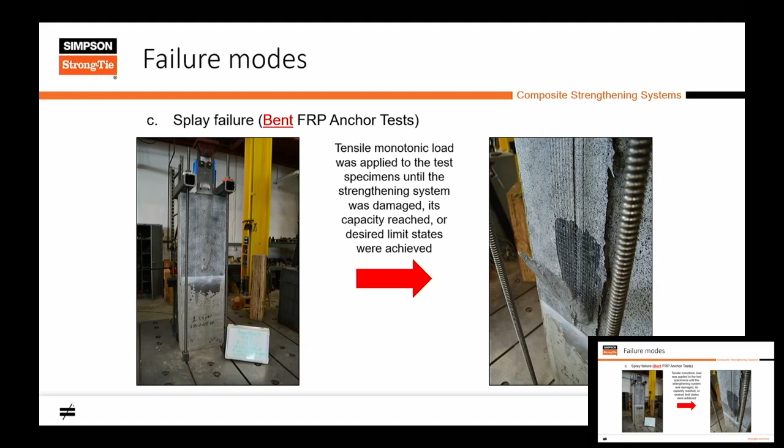So this was the testing data that Junri actually put together. The goal here is don't look too much into numbers, but this was for a project in New Zealand where you have 50, 65, 75 millimeter embedment depths, very shallow toppings. So he did testing at 50, 65, 75 millimeter embedment depth anchors at 90 degree bend as well as 135 degree bend. H is high strength concrete and L is low strength concrete.

What he observed was at a certain point, if you are going deeper in concrete, you get an anchor rupture - AR is anchor rupture failure mode, which is more predictable. But as you go to shallower embedded anchors, you start pulling out your anchors or you get a concrete bond failure for the anchors. Again, something that we know and something that we need to incorporate in our designs.

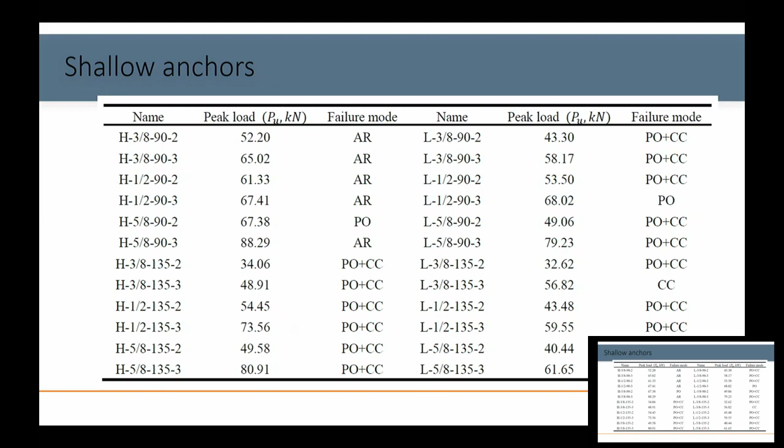And then after you do all this correctly, let's say you design this perfectly, you put it on the project, so it goes for tender, and you have a contractor going and installing this on the project. How are we sure that the FRP that we have designed is now installed correctly?

So this is a project in California about 3 years ago. We all thought that everyone installs FRP anchors correctly, and none of us checked FRP anchors on site until a school authority called DSA in California said, well, you're relying on FRP anchors, they're doing so much, you need to test them on site - proof test them on site. And we said that makes sense, so we tested the anchors.

The next specimen that failed did have a puff of dust just come out from the hole, so the hole was not cleaned properly. The third test that failed was because the epoxy was not cured - they had not mixed the epoxy correctly. It's 2 parts that mix into one.

So again, this all seems simple enough, but at times when contractors are trying to install more and more anchors on site quickly, you could potentially lose some quality control in that process. So once we started testing anchors on the job site, they tested about 60 to 70% of the design load. After that, about 500,000 anchors have been tested on job sites, all of them passed. But the fact that when a contractor knows there is QC testing on site, certainly things start improving at that point.

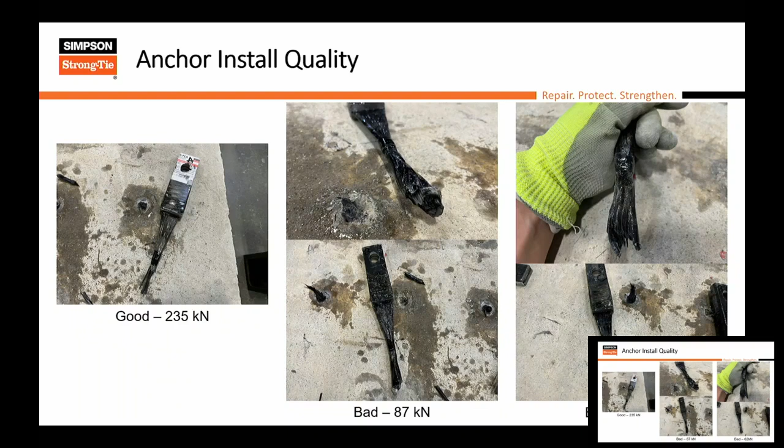So what we recommend is to put it in your construction specifications that a contractor is supposed to proof load anchors before the project starts. You're not really testing the anchors, you're actually testing the installation quality of the contractor at that point. And then the other two tests, which you may already have in your construction specifications, are the bond testing of FRP on concrete and creating coupons to test the tension values of FRP on the job site.

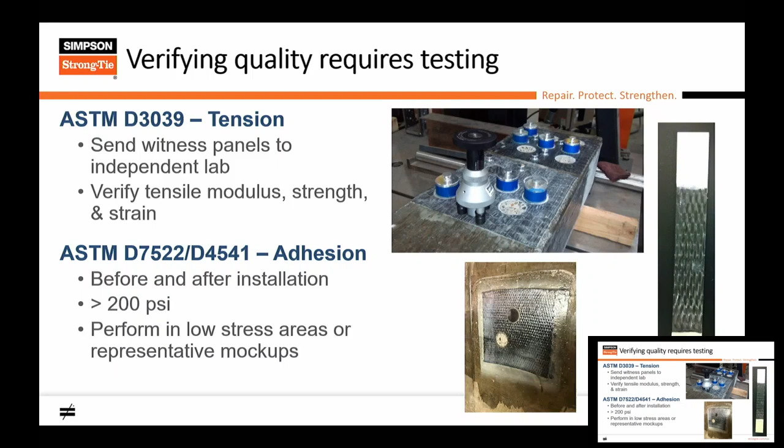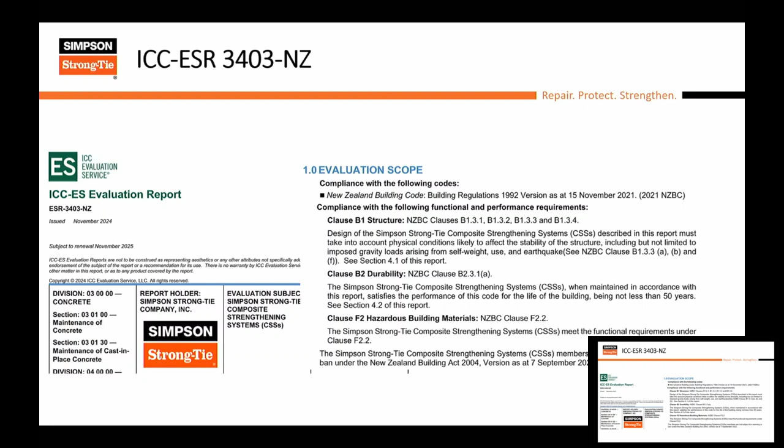They evaluated it for the New Zealand building codes. All the tests that we showed today are part of that ICC report. So that's there now for the New Zealand building codes.

And then the last thing I would end with is this: we gave a lot of information in 45 minutes, 50 minutes to be exact. The intent here was not that you go tomorrow to your offices and start designing FRP on diaphragms. The intent here is you guys are going to have more questions, and we are there to support those questions. We can help with designs. We can provide that assistance to your team as you look through this in your FRP projects.

And the last point, if there is a project which needs some specific testing, we can test that in our lab in Stockton or in University of Auckland, and then provide that solution for that project.

But that's what I had. I think we did it in 50 minutes. Yeah, very good, thank you.

So we could be talking about this for the next 5 hours, but I was adamant that we need to cut it down, and I think it was a very good job. Thank you guys for your efforts.

Do you want to be the moderator? I want to ask a lot of questions. Okay, do you want to be the moderator? Sure. It's a bit awkward that I am the moderator and the person taking questions. Yeah, no, that's fine, Henry is part of ASC, so I think it would be better if you can take it. Yeah, sure, thank you.

Okay, questions. So my understanding is, in the context of diaphragm design, horizontal plane, if you're looking at just reinforcement, analyzing a diaphragm, my question is about the analysis to gather your forces for your design of an FRP retrofit solution. So if you had just in situ reinforcement and it was compliant to the current code, in terms of NZS 3101, in terms of strain limits, only seismic grade reinforcement is now allowed in terms of strain. Because you're looking at a horizontal plane, it's a D region, plane sections do not remain plane, strut and tie analysis is a plastic design essentially. So you could, if you're looking at reinforcement that's adequately detailed, cap the tension limits of your ties, and cap your compression limits of your struts.

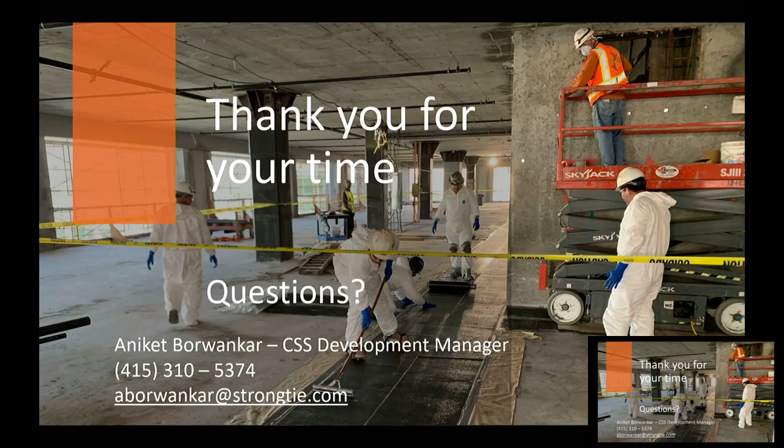Just a quick question for the first presenter, going to the very first hysteresis curve example, for the very squat shear wall - the very first example, not the other walls that were falling apart. The black line, where that was like a shear control wall - you tell me when to stop. Just go right at the beginning. Yeah, it was almost at the beginning. Can you explain it? I remember.

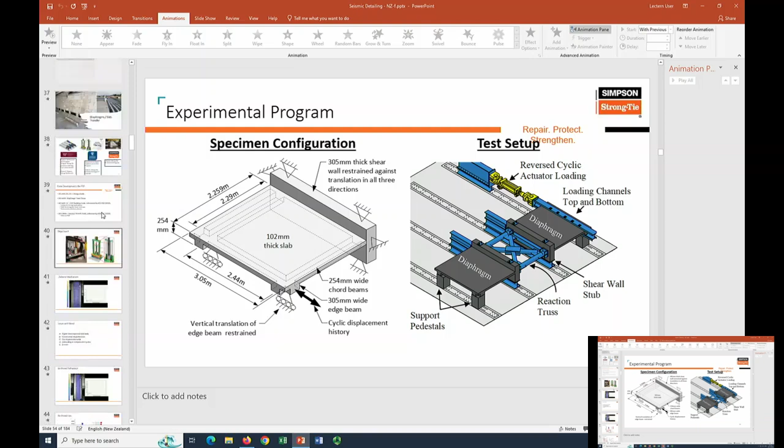The way we're looking at this, we call it an emphatic ductility reduction factor - it would be better for the black than the red, but you get more strength for the red. So the way we're designing, we look at an enhanced strength, but then we put ourselves in that table - there's a shear stress term. We're basically saying, hey, you're in the highest shear stress term, you're probably crushing the concrete now, so depending on axial load and shear stress, you're going to get maybe a reduced R factor. So you have to see how beneficial it is to the actual design - you might actually find, for a particular wall, it's better not to strengthen it at all, or do less strengthening than more.

Yeah, you may want to tune it, right? The other thing not captured here is there are other mechanisms that can happen in a wall, for example sliding that takes over. So I talked about it being very hard to change it to flexure control - if you can do that, that's ideal.

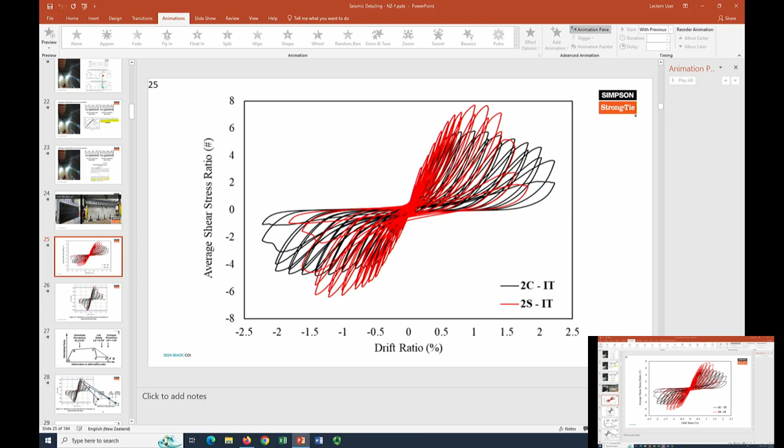That's why I think it's really key that the designer of record, the structural engineer of record—we call it the design professional in the US—who has the overall project, should understand this and think about it in the overall context of the design, rather than counting on a supplier delegate design process that isn't thinking about all those interactions.

There was actually another specimen he's mentioning where you got a lot more ductility because it changed the failure mechanism from a shear controlled failure to a sliding shear. In the pictures of the walls that I showed, the response just keeps going at that point, because you are not changing the failure mechanism.

It depends on the situation. I should say this is one-sided—effectively FRP on one side only. They're working with a challenge that these are underground walls, or even in hospitals where you don't have access on both sides or near elevators. If you could access both sides and confine the boundary region well, it's a different story—that looks a lot better. That gives you higher force and much higher ductility if you're able to put FRP on both faces. So one-sided has limitations.

We'll have to walk through those limitations. But if you have both sides, that improves the performance dramatically, because the failure here was that the boundary regions basically collapsed. This got a nodal failure—if you can confine the boundary regions, that's preventing the drop, and the response will continue going straight.

Does the existing reinforcement also contribute to this, in terms of the strain they pick up? Yes, absolutely. They are different, but how do you measure that—which one is picking up? You're talking about what strain is in what?